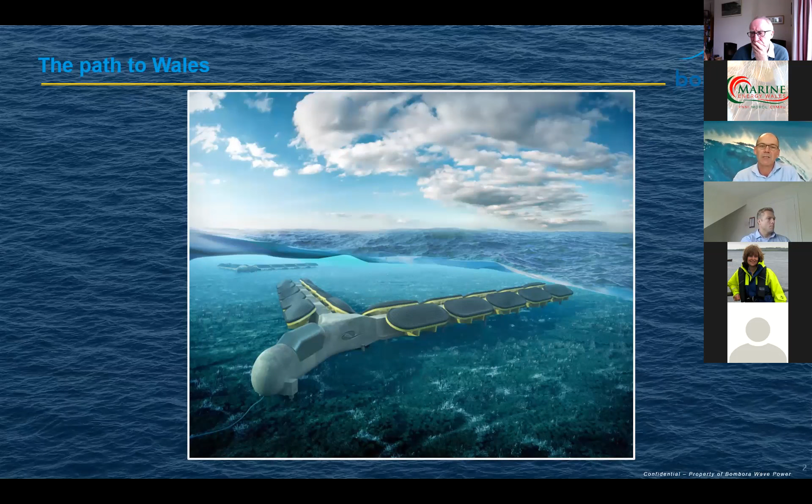So in terms of the main project we've got going on, it's our Pembrokeshire project here in Wales. This is to take our technology and construct it into a full-scale device, a 1.5 megawatt mWave. This is a very expensive project, 18.4 million. And we'll be demonstrating and testing it at the META test site, off the coast from Milford Haven.

The status is that we're well progressed on construction, entering into the assembly phase. All the site consents are in place, and we've started the site works as well. We had planned that we'd be deploying late this year. With COVID-19, that has pushed back our timing a little bit, so we're now looking for deployment early in 2021.

COVID-19 has been a bit of a disruption in terms of supply chain, but interestingly, it's also given our engineering team a chance to take stock of where we are, look at our designs, and really consolidate our learnings from the project thus far.

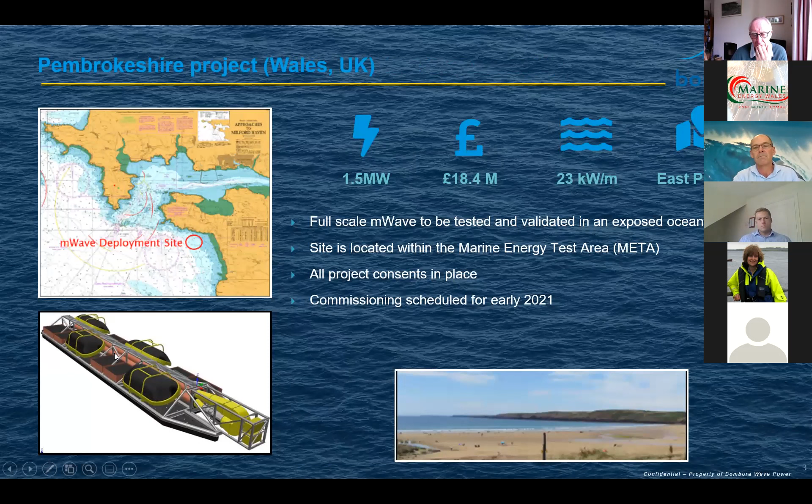So in terms of where we are today, we've talked about Mainstay, you've heard about them—they're a very major part of our supply chain. This gives you an example of the type of work we're doing today in terms of construction. This steel structure here is half of an M-Wave. If I go back to the previous slide, the steel structure I just showed you is half of one of these, this section here. So it's a very large structure we're building. This is the work being done down at Mainstay.

Also very busy here at Altrad, also in Pembroke Dock. So this is a cell module, one of the cell modules that will be transported across to Mainstay for final assembly in the coming days. This is currently all in construction, and it's brown. It'll be transported on the 12th across to Mainstay, and it'll be looking bright and shiny yellow at that time.

I guess the great thing for us has been the engagement with the local supply chain, which has meant very close engagement between our engineering team and the supply chain. With these innovative new early-stage projects, that's been very important to enable us to move forward.

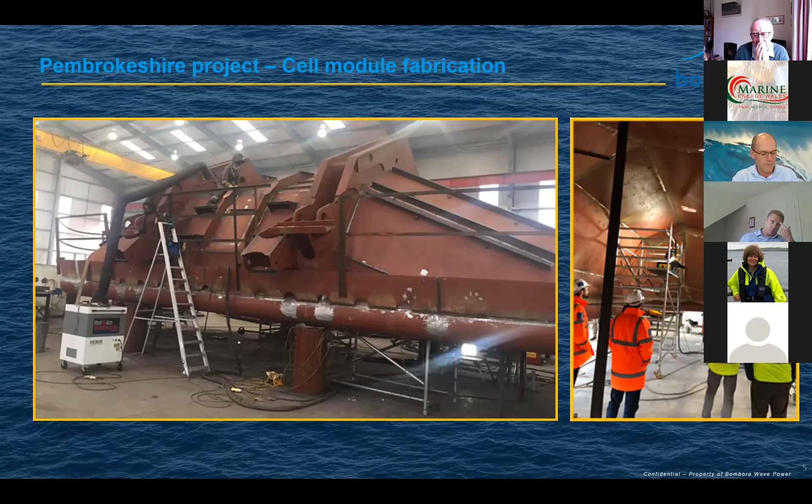In terms of where we are today, we're going through the final construction phase, bringing together all parts, a lot of them sourced out of Wales, some sourced from other parts of the globe. Entering the final assembly phase, with deployment early in 2021.

The major aspects around that: we need to demonstrate that we will survive the big storms that we get here in Wales, and we need to confirm the performance of the power generation from the structure. We'll be getting third-party endorsement and validation of that as we go forward.

So I guess that's where we are. This project is all about proving the technology works, and that can then lead into products. So the main parts we're proving are the cell module here and the PTO.

These key components can then be used either for the fixed type M-Wave, so this is attached to the seabed, or it can be attached onto floating platforms such as this one. We can then integrate that into offshore wind parks, offshore floating wind parks, and in the future, we can even consider integrating solutions as well.

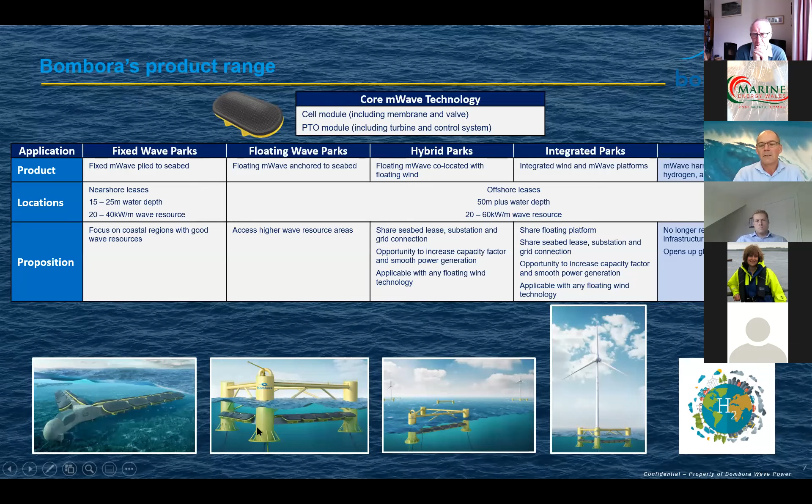A very important part of the mWave technology is the fact that it's modular. I talked about the cell modules and the PTO module. We can apply them into modest-sized mWaves, but we can also scale it up. Reflecting on what's happened in the wind industry, it's very important that your product can scale up through the megawatt scales, and that will drive down the LCOE, which is critical for us.

Another key thing about our technology is the fact that these key components are removable as modules, which aids serviceability. We can change these modules at sea, and they're being designed for interchange or service exchange.

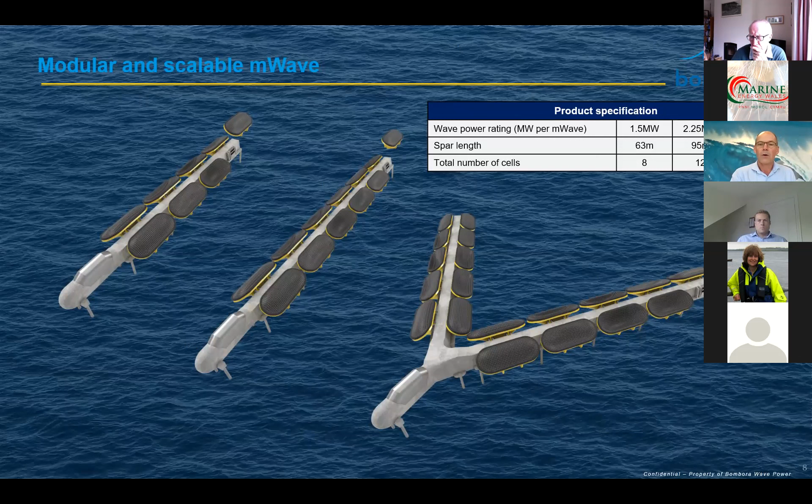This is our first product, the fixed mWave. This COVID-19 period has enabled us to take stock of our design work and update the earlier work we've done on our LCOE project, which was initially done through Worley Parsons. It certainly enabled us to take all learnings from this project thus far, redo our costing, and look ahead at our plan for commercialisation.

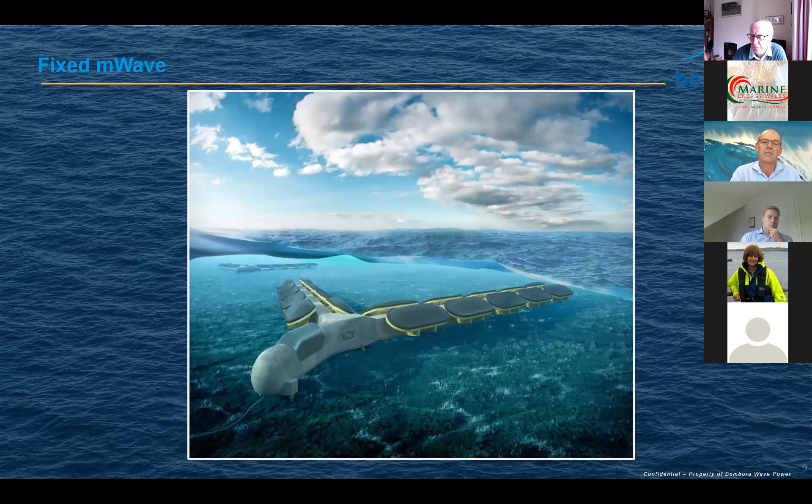As I mentioned, the first product range is the fixed mWave, and then we have this floating solution. The central picture here gives you some idea about how we would integrate into offshore floating wind farms, and shows the potential for a very significant increase in the utilisation of that space and the infrastructure involved in these floating offshore wind farms.

We're very excited about that as a future opportunity, and we're looking forward to doing a follow-up project here in Wales, where we take this from the early concept work we're doing with the Catapult through to a real product.

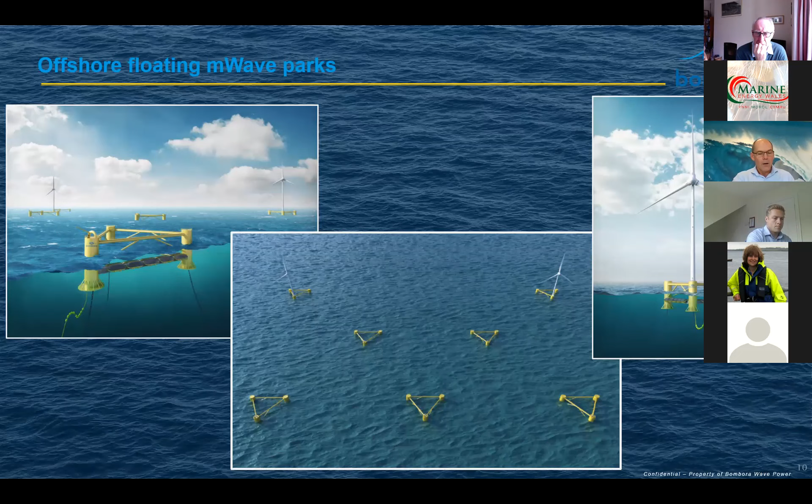Okay, as I said, we've had time over the last few months to really look at our LCOE, and driving down that cost is going to be key for us being able to roll out our product into the global marketplace. So we're taking all those learnings and pumping that back into our costing models, and we see a very positive roadmap in terms of how we're going to drive down our LCOE.

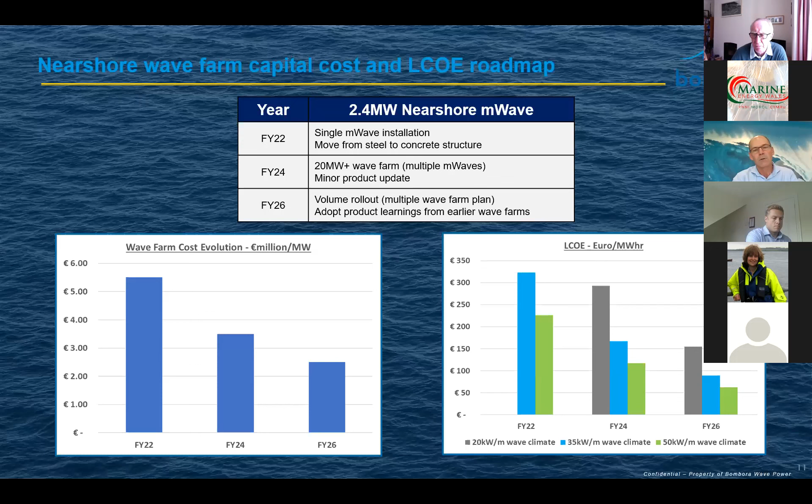So I guess this is all the current activities. In terms of our next stage, we're looking very closely at the project off in the Canary Islands. This project is currently going through the consenting phase, so we've been getting the grid connection organised, doing the wave climate surveys, and doing the bathymetry surveys at the site on the north side of Lanzarote. This project is now moving into the project financing phase.

Okay, so I guess this discussion is more about what we're doing in Wales. We've moved our headquarters to Wales, our team is all here. We were once upon a time an Australian company; now I think we're pretty much a Welsh company. Certainly our staff are Welsh, and a lot of them are located here in Southwest Wales.

We have been growing our team. Exciting times for us in terms of the fact that we've already strengthened our board with very experienced people from the finance sector and from the project sector, particularly in the wind sector. Commercialisation is very important for us, and the building of our strategic relationships is very important. So we're excited to be welcoming Rembrandt to the team, and also moved our CFO operation here to the UK. We're seeing a real strengthening of the team and a growth in our commitment to this area.

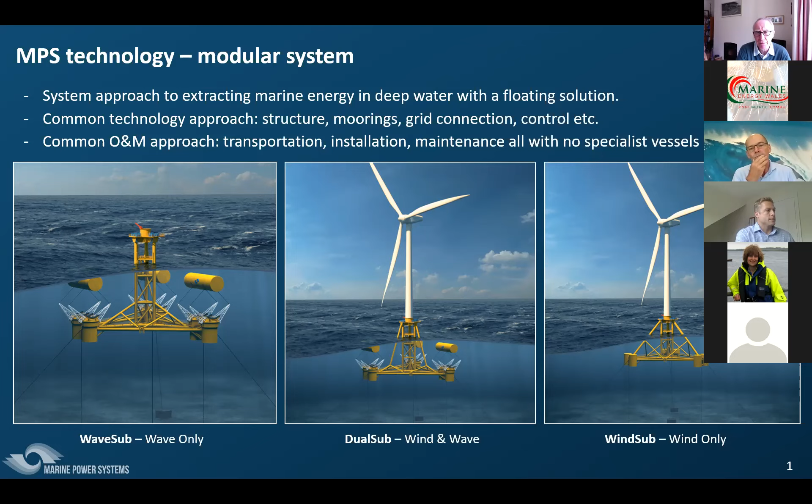Hopefully this isn't any news for everyone, and as Martin just alluded to, we are developing a number of products. Our portfolio contains our proprietary technology, the WaveSub, which is for capturing wave energy, and then we'd have the WindSub, which is standalone for offshore floating wind, and then the DualSub, which is a combination of capturing both offshore wind energy and wave energy. It has a number of advantages, and if you're not familiar with our product portfolio, please do have a look on our website. This is why we're doing it. The end game and the vision for Marine Power Systems is to have a technology that can optimize the extraction of both of those sources of energy and give the best return on investment per square foot of seabed.

But this presentation isn't about exactly or standalone what we're doing as a company on our technology. It's about how we've contributed to the sector and our plans going forward. So I'm just going to concentrate on that.

To date, the team's done a significant amount, and the biggest project that we've achieved in the culmination of many years' work since we founded the company back in 2008 was the testing of a scaled prototype, a scaled WaveSub prototype, to demonstrate a number of the USPs of the device, like its simple deployment, low cost maintenance, its power output capability, survivability, and many other functions of the device. We demonstrated that at sea, down at FabTest, completing that project the back end of 2018, early 2019, with some ongoing works.

It went very well, and probably many of you have heard me or Graham, the CTO, present about that project, which is a WEFO funded project. Obviously, as expected, we've done a significant amount of other work in the background - computational simulation, smaller scale prototype testing in wave tanks.

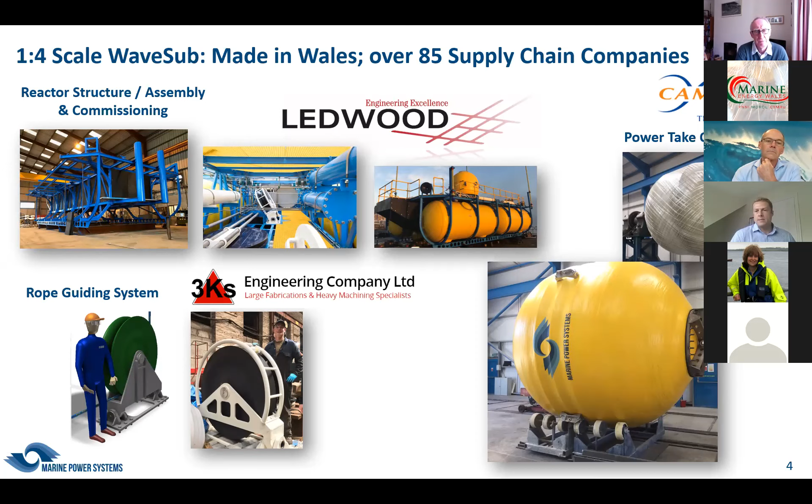And then the deployment, installation and testing. We have had then and continue to have significant support from Marine Energy Wales, the Milford Haven Port, and Leask Marine were one of the main contractors that helped throughout our marine operations, deployment and recovery, and Williams Shipping. So, you know, just a variety of some of the fantastic companies that we have on our doorstep, which is great here in Wales.

Relating that to some kind of numbers, I know the State of the Sector report is anonymous, and everyone's fed in, which is great that we've all done that. But we're, I guess, quite proud of the figures, as clearly others should be and are.

So for the quarter scale project, we'd like to share these figures. The quarter scale project that we completed - 5 million alone was spent, inward investment in MPS, in achieving that. 11 full-time equivalent jobs in Wales. We've expanded since, but that was for the quarter scale project, equating to 70 person years employment in Wales. And more than 60% of that supply chain came from Welsh-based companies. So hopefully, a significant achievement already.

Plans going forward, we're on a 4-year WEFO funded project as we speak. We started that in mid-2019 and we achieved 12.8 million grant funding, which we gratefully received from WEFO towards our full-scale WaveSub demonstrator. This project is going to help reduce the risk, get us to a blueprint for our first commercial scale builds. Again, happy to discuss about this project, potentially at another webinar, another date, or at an MEW group. But in a nutshell, it's a design, build, full-scale demonstrator, using hopefully much of the Welsh supply chain, and to get that certified.

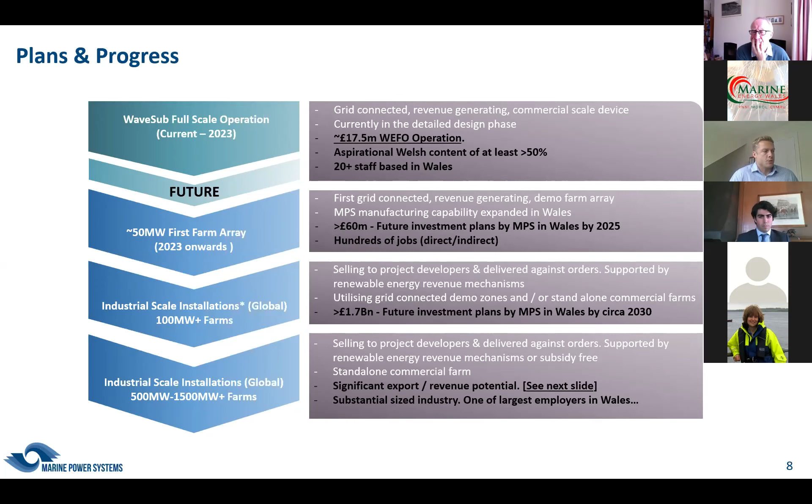A good example we always use is Vestas, who hopefully is a well-known company to all of us on this webinar being in the renewable sector. Vestas has 17% market share of all wind turbine hardware sales, turning over 10 billion annually in revenue with 35,000 employees across the globe - a fantastic achievement for a first adopter, an early mover that made sure they got a foothold in that industry. That is the true, genuine potential for marine power systems or any other company working in this sector at the moment.

Just by comparison, if you look at some of the top companies across the UK - and some of these are based in Wales - very companies are doing particularly well. Airbus, Admiral based in Wales, Redrow Homes, all turning over close to £2 billion a year with thousands of employees, but cumulatively Vestas is achieving the same output. So that's why, in addition to those environmental and social benefits, there's a huge number of economic benefits for us to get these industries to succeed in Wales.

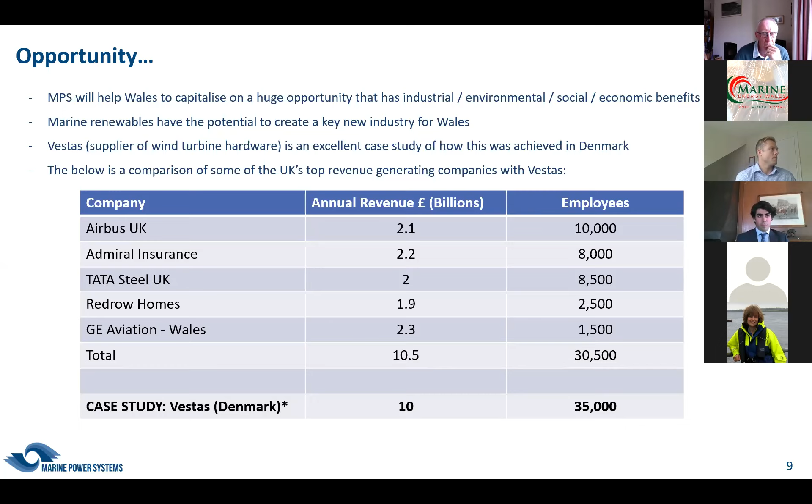I kind of rattled through, but I think this is my last slide, and I guess this is the culmination of one of the key points we're talking about today: how marine power systems and other companies are going to help us post-COVID in the green economy. So short term, we've got a very clear picture and a very clear pathway we're operating on right now. It's to design, manufacture and test our full-scale demonstrator, and that's happening and going very well - a 17+ million operation, with an aspiration for a significant amount, if not 50% of that, to be spent in Wales. So that's good news. That's kind of a given. It is happening already.

And supports the supply chain. But going forward, I think this is the key message for the medium to long term. It's well known but worth reminding ourselves that the IEA, the International Energy Agency, predict that to meet our global energy demands, they're going to increase by 30% between now and 2040, which isn't far away - equivalent to adding another China and India to our energy requirements. So this market isn't going anywhere, it's just expanding.

And marine energy - this is talked about by MEW, Ocean Energy Europe, Renewable UK and others. We're saying there's potential to supply 20% of global electricity demand by 2050 from marine renewable energy sources, which will significantly contribute to the decarbonisation of Wales if we can achieve some of that here. And that's clearly what MPS is setting out to do.

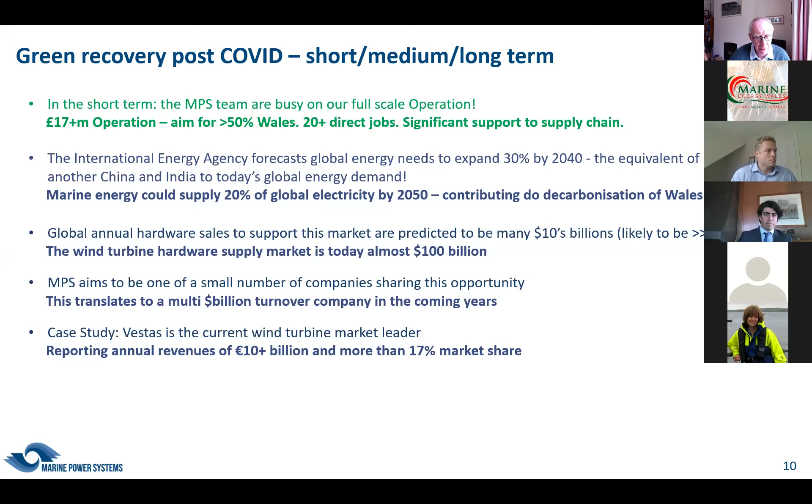So now moving on from wave to the tidal stream sector, we have Osian Roberts from Minesto. Delighted that you've managed to join us today. So I think we're setting you up to give your presentation. So when you're ready, Osian, over to you.

Okay, perfect, thank you. Can you hear me is the first question. I can hear you, yes. Okay, I'm just going to share my screen. Hopefully you'll be able to see that in one second. Yeah, I can see that. So can you see the actual slide, or is it in presenter mode, or are you seeing the slides at the side? Just so I can make sure. I'm seeing the full screen slide. Okay, perfect, just bear with me.

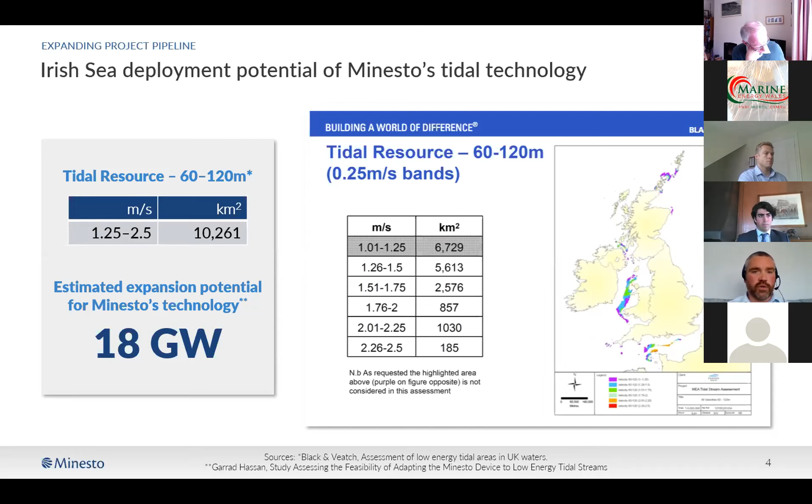This study is a third-party study on our behalf, so it's not us coming up with this. It's us working with others to try and ratify our aim of becoming a really world-leading technology provider in this industry.

To support that, we talk about green recovery. In order to recover, we know the resource is there, but we also know there's a little way to go for our industry in order to get where we need to be, to bring in project finance to capitalize on that resource. That then has the effect of increasing the supply chain possibility for diversification and clustering, and expanding that offer in the local or national supply chain.

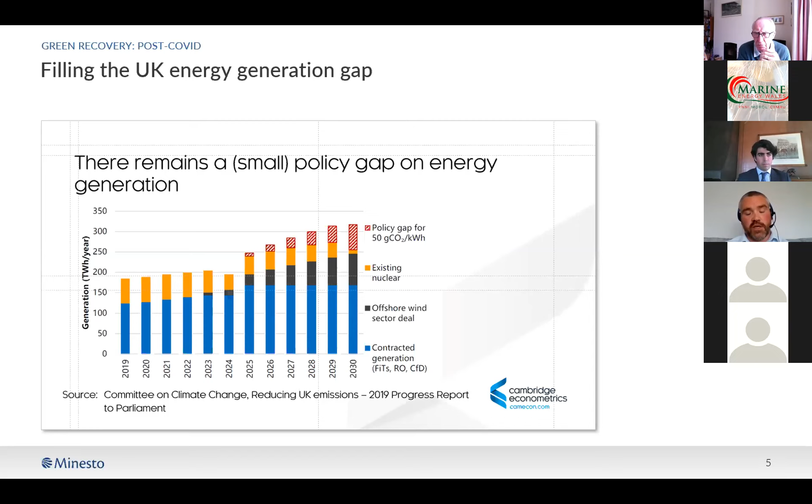My point here is that we have this industry ready to go. We have this industry with global expansion potential right here on our doorstep in Wales, where we can use the facilities we have to expand and manufacture what we need to offer this to the world and to the UK. This industry is ready to go, and we're best placed, with world-leading technology and world-leading resources, to certainly contribute to the green recovery plan.

Again, this is my last slide really, I've already touched on it. We do need policy support. The green recovery is there for the taking. We can contribute, we can be world leading. We want to do it from Wales, and we want to do it with Welsh companies or UK companies, but we need to make sure we're supported by a proper route to market, whether that's through revenue supports in UK government, through the Welsh government, and also a smooth and pain-free consenting regime.

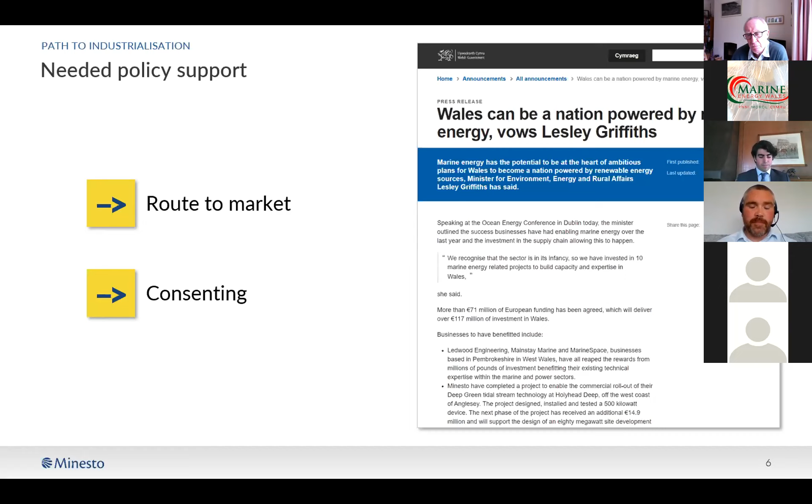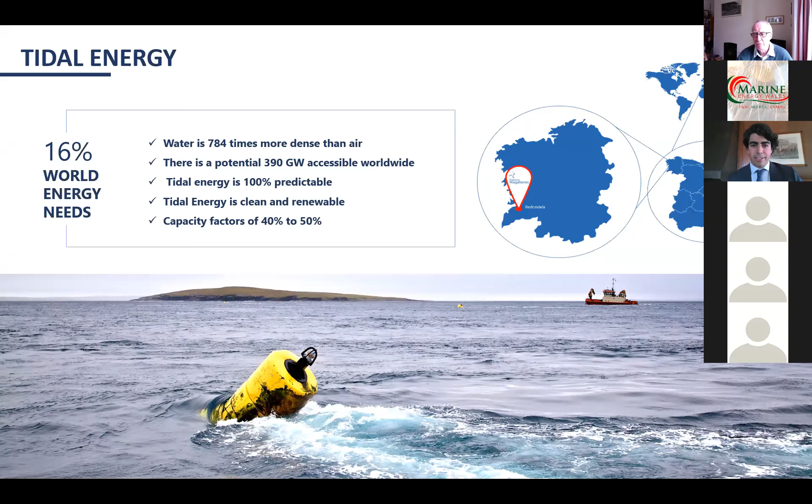So he went on and gathered a team, and they started to try to have an idea of what would be the ideal technology. They knew it had to be robust, because some technology tried before had failed because of the rough conditions of the sea and the tidal currents. It needed to be of high output, easy to manufacture, and easy to maintain, because some structures are very difficult to maintain on these sites.

So what this team did, led by the founder, was to look—even though we are a technological company, we are technology risk averse. We don't like to take technological risks. We want to focus only on the risks on the technology that is absolutely essential for us. So we looked at two mature industries, the wind turbine industry and the naval industry, both present in where we're from, in Galicia.

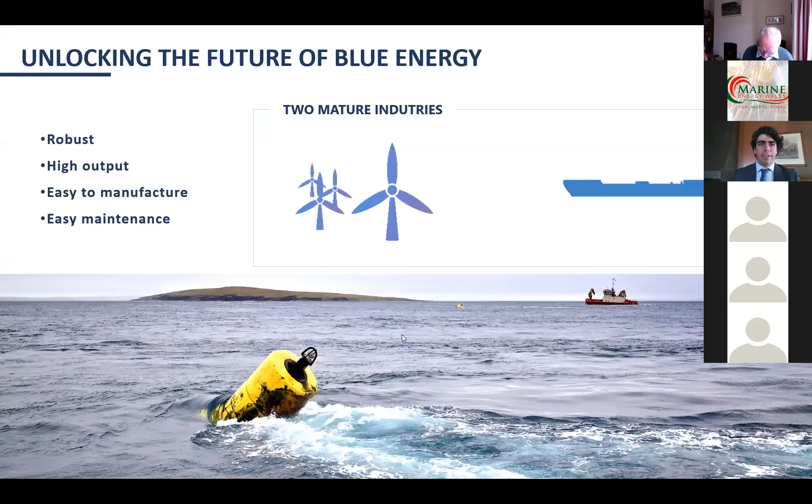This is a 2 megawatt platform, and this is the result of this first idea of combining windmills—in fact, two windmills—with a boat. As you can see in the picture below, that is literally what we have done. The whole structure is designed by naval engineers, naval architects, and all the machinery and everything inside comes off the shelf from the wind industry.

So we only had to design the rotors and of course the control system, but our aim was to make this as simple as possible so that it could also be economically viable, not only technologically viable, so that one day we could deploy more. If it's not economically viable, it won't be successful. So we reached our goals with this first platform. Right now this platform is in the Orkney Islands, being tested and optimized. It's very close to reaching full validation, and after that comes its commercialization.

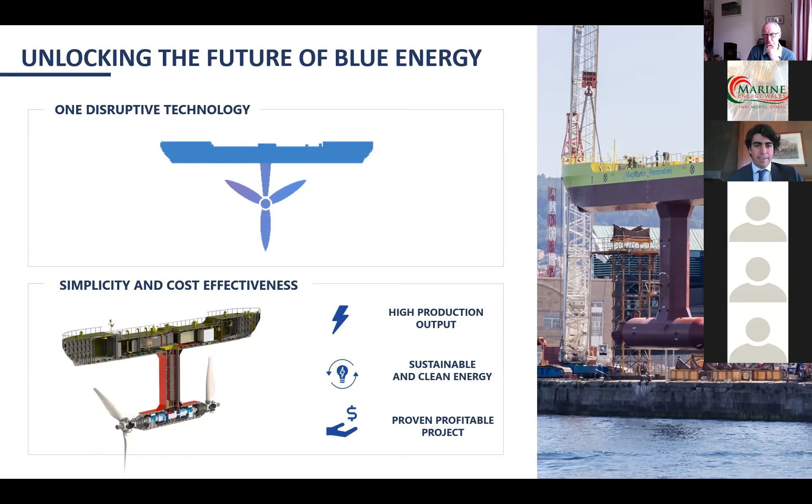The system is very simple. The platform is anchored, with redundant anchoring on both sides. As the tide rises, it creates a current in one direction, and these tidal currents cause the blades to rotate, which power the generator just as a windmill would, producing electricity. This electricity is taken to shore to a substation through an undersea cable, and this substation is connected to the grid and takes the electricity to our homes.

And the interesting and best thing is that when the tide lowers and the current goes in the opposite direction, the other chain works, and we have a pitch system that rotates the blades, so it's as efficient and works just as well in both directions.

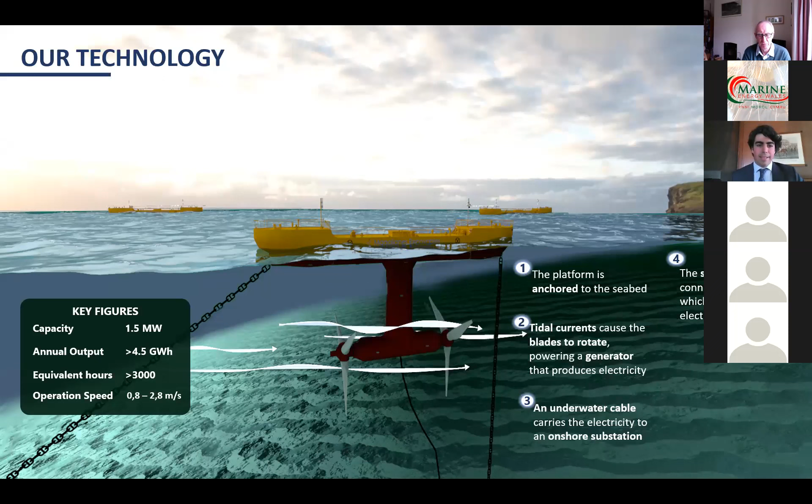So as I explained, our past is in Spain, where we developed our first prototypes. We would tow them because where we're from in Galicia, we don't have currents, so we had to tow with a towing boat to simulate the currents. And there we started the first tests on the first ATIR.

Right now, our present is in Scotland, where we are testing and optimizing our ATIR 1, the full-scale 1.5 megawatt platform. And our future comes necessarily to Wales, which is, in our opinion, the point of the arrow pushing tidal energy in the world.

So with the Morlais project, we plan to deploy at first 20 platforms, which will be 30 megawatts, and of course all that deployment requires an infrastructure and a supply chain behind it that is amazing.

And we've seen this from our presence in Scotland. We only have one prototype, our first platform, and we've moved many different companies around it—towing boats, mechanics, divers, and many others, including accommodation. We also have part of our team there in Scotland, so that will only be multiplied in Wales.